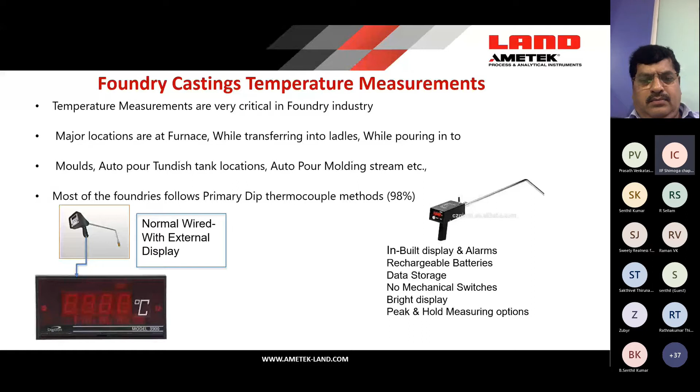Our solutions are, traditionally talking, these are all the locations where the current thermocouple method, either wired, or now with digitalization, you have Bluetooth or Wi-Fi enabled temperature measurements with display. So you can use thermocouples, and of course you need consumables, which means ceramic to platinum type, different types of thermocouple tips available. We estimate more than 95 to 98% of foundries have traditionally been using this thermocouple method.

These are the kind of examples we can show, but you may already have a much better idea of the traditional way of measuring temperature. This is what has traditionally been used in foundries for temperature measurement.

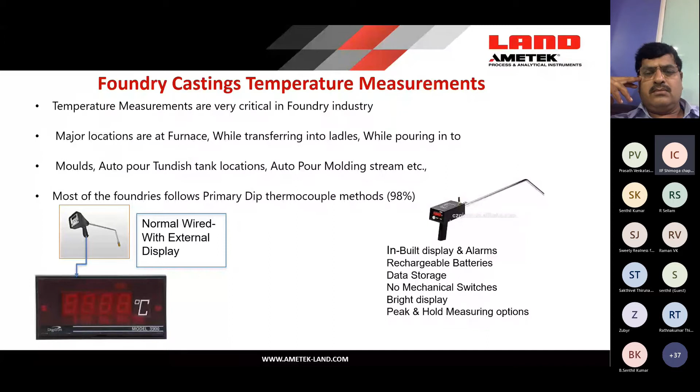So when you talk about this primary method, we all agree that currently the thermocouple stands as the primary method. But talking about the primary method, there are also a lot of challenges with the process. It is not only about the consumable, but I have personally visited more than 300 to 400 foundries in my last 10 years, and worked with foundries.

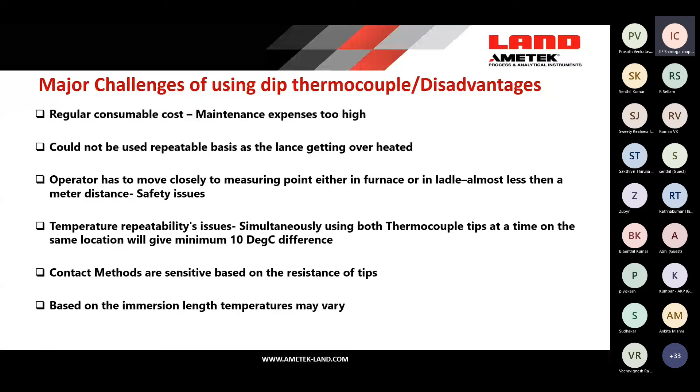While discussing with them, the main challenge in terms of feedback from customers is basically the regular consumables, which come at a considerable cost. So the maintenance is a little high, with recurring maintenance costs.

Any thermocouple or tip consumable could not be used on a repeated basis because of its nature, and you have a resistance challenge because it is a thermocouple technique, basically two dissimilar metals, and when you contact them, the resistance changes and the temperature measurement changes.

This is a kind of scientific way of analyzing. This is what it's been shown. Even when we try to demonstrate, when we measure two calibrated thermocouples at the same point, the difference between those two is really high.

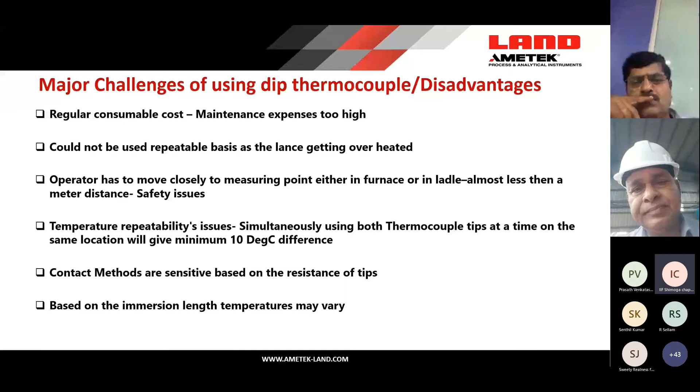So this is sometimes not even acceptable to the foundries. So it is one of the points where we really wanted to propose our solution. It's a kind of challenge.

And then safety. So we are now moving from manual method to automation method. When you talk about automation, Industry 4.0, now even digitalization techniques, and we are talking now Industry 5.0. So safety is, of course, a major concern for any foundryman and any foundries. So when you do these safety operations, there are costings involved.

As I mentioned, repeatability issues when you compare two thermocouples, we are talking 10 degrees, but even from my experience, I have seen even a 30-degree difference between two calibrated thermocouples at a time, because of the penetration or maybe slag conditions, etc. So that is really going to be a big challenge.

Also, it's very sensitive, as I mentioned. So immersion, people to people, the immersion length can vary, and that can also cause some temperature measurement challenges.

So this is where AMETEK Land developed dedicated solutions, which has been present in the market for more than 15 years. When I joined AMETEK Land business in India as a service and technical support manager, this is what first I have seen.

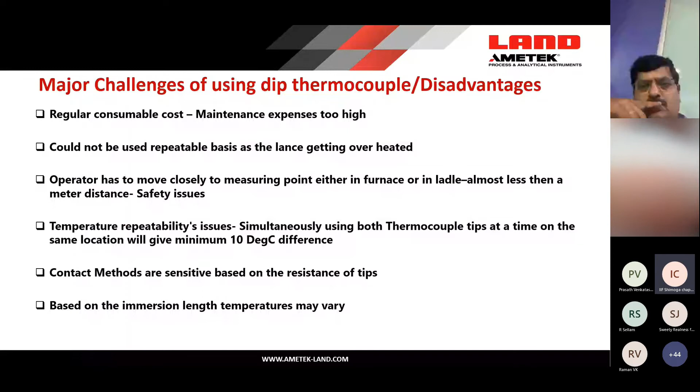I come from the southern part of India, where I did my education in Coimbatore. So I was very curious, and I had some idea about castings. While I was doing my education, I knew the challenges in terms of the process. So when I joined the company, I came to know about these temperature measurements, and I really wanted to position the product where it was existing.

With the dedicated design to support this foundry liquid metal temperature measurement, it is going to be a kind of complement—I could say a direct replacement method for the traditional thermocouple methods being used in the foundries. So this is where AMETEK Land comes in.

It also has various offerings in terms of portable to fixed pyrometers and also various thermal imaging techniques. So we position three major products for foundry customers.

One is Cyclops, a portable thermometer made with a dedicated wavelength where it is able to see through challenges in terms of smoke or fumes, or gases, or visible challenges, so that you can get 100% energy from the surface and it can give you the right temperature.

Of course, these pyrometers need to be calibrated, or I can say compensated, in terms of emissivity and radiance with respect to the calibrated thermocouple. That will be done only once in a lifetime. So normally you can then use the pyrometer for 10 years.

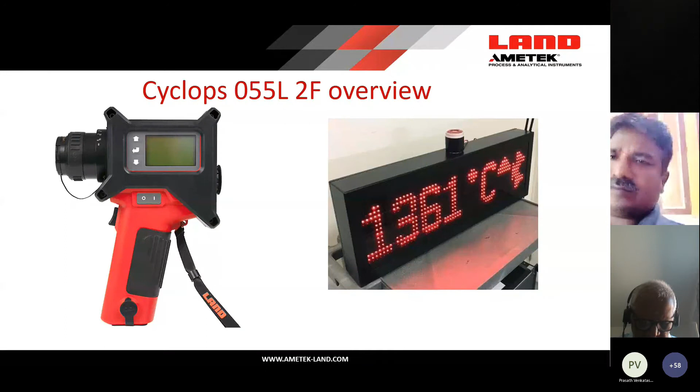Just to give you an overview of the product - when you look at the pyrometer, you can see there is a front lens where you can see the display. You just need to look through the viewfinder and trigger the button, then you can see the temperature.

This is not going to take more than 3 or 4 milliseconds. It's very instantaneous, and you can take multiple measurements, and of course you can compare with the thermocouples.

This is what we normally do during the demonstration. We ask the customer to place calibrated thermocouples, and we measure the temperature and adjust the emissivity constant. Once we set up the emissivity constant, that becomes the constant factor for that particular metal composition, and then you can compare.

Within a day, after a couple of measurements, the operator gains confidence, and we have proven in most cases the temperature accuracy is within 5 degrees - starting from cast iron to gray iron to even SG and various grades, even stainless steel grades. We have done this demonstration and supplied it, and it is working within 5 degrees temperature measurement.

Knowing the foundry application, where it's going to be high temperature and operators always have hand gloves, we designed a dedicated thermal jacket, a protective jacket. This is something we developed for our product to be safer and to last longer in the foundry. We even have a protection mechanism for the lenses.

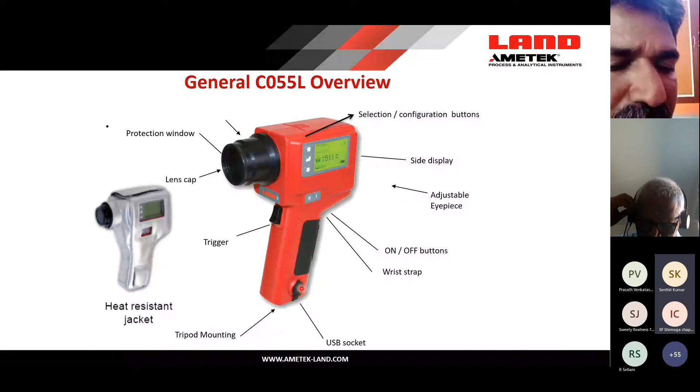And of course, it has a USB - you can directly transfer the data, and optionally we can use big displays. You can transfer the data directly to the display, which can be connected to your computer. So all this one-to-one complete solution we have made.

As I mentioned, a Bluetooth display can be connected - the instrument is connected by Bluetooth. We have LED displays, or segment displays, where we developed 4-digit displays so you can get instant temperature readings within 3 to 5 milliseconds, as soon as you trigger the button.

It's not going to take more than a second to display the temperature, up to 40 meters distance. We have even gone close to 40 to 50 meters in some applications, where the pouring line ends a little further. We can still show the temperature, which is very important for the floor people, particularly the quality person or operation team, when they want to see the exact temperature measured by the operator at the shop floor.

So this was one of the points - you are able to set the alarm limits, so that when the alarm limits are reached, let's say in the furnace, or even during pouring from first mold to last mold, you can set up the temperature minimum limits, and it can give an indication.

Using routers, you can connect Wi-Fi if you have Wi-Fi capabilities. Nowadays we are talking about modernization. A lot of foundries have Wi-Fi capacity, so we can integrate directly to the PC without downloading any wiring system. We can do it via Wi-Fi.

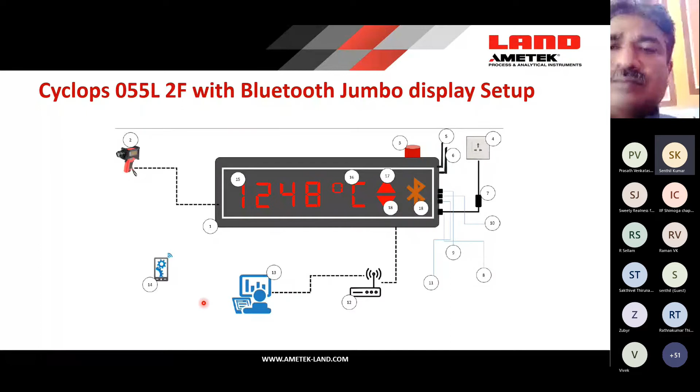So as discussed, the main benefits of our Cyclops pyrometer, talking about it from the foundry's perspective, mainly it is going to produce a major cost saving benefit. The major cost benefit comes because there are no thermocouple tips - this is something we are not just quoting, but based on our last 10, 12 years of experience. We have seen customers, when they started using it, give us feedback.

We have a lot of case studies made across various regions in India. They quoted what the consumables cost was, and after using our device, month 1, month 2, month 3, and now what benefit they are getting. This has been presented by the customers themselves.

So absolutely no consumables, and very fast and accurate temperature measurement, which is very important to control, especially in the furnace. We all know about superheating - I don't need to explain. The challenges of overheating or superheating issues affect the metallurgical composition, which leads to quality control issues and mainly rejections.

It's also going to help directly for the foundrymen. And of course, we have seen indirect benefits, particularly talking about energy saving. When we try to do automatic control of furnace closed loop systems using online or even portable devices at some point, you are able to control the power or energy which is feeding continuously in kilowatt capacities to the furnace. So there is a definite cost saving in terms of electricity, and we can avoid overheating.

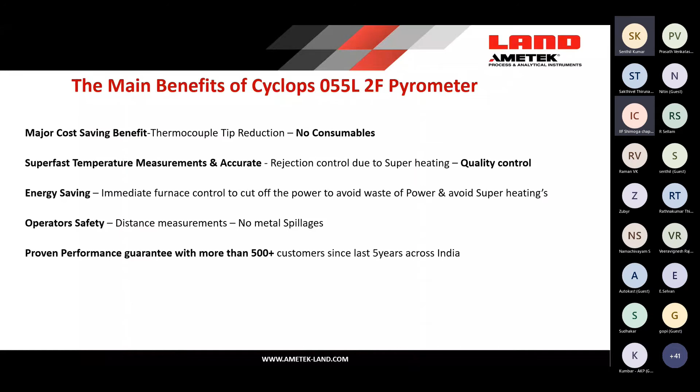This is an example, where you can see the distance at which operators are standing - they don't have to go closer. You are able to measure the temperature at a distance.

And even with this kind of surface, you can be very far and still get accurate temperature, because our device does not have any focusing - it always follows a parallel beam. So the distance does not affect it, whether it's 1 meter, 2 meter, or 3 meter. As long as you can see just 5mm of clear metal space, you can get the temperature measurement.

This is given with a wrist strap, so the instrument doesn't accidentally fall down. We have a big wrist strap over the neck, and also for the hand, and there is a heat protection jacket offered along with the system.

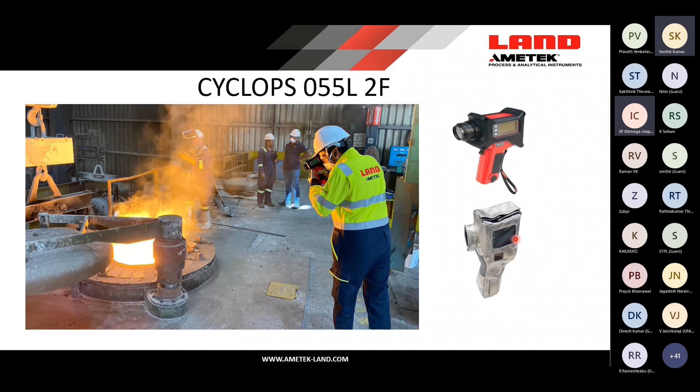So it's a very simple 9 volt Duracell or equivalent 600 milliampere capacity battery. You can use this, and it's very instant.

You can turn it on and off, and there are 4 different temperature measurements possible at a time when you trigger this.

So the major measurements we consider: melt master. There is a special melt master mode which has been designed for this application. Most foundries basically use melt master.

It takes almost 66 readings in a single press within a couple of microseconds. It takes 66 readings and averages them, giving one value, which is based on a kind of bespoke algorithm used in this device to match your thermocouple values - which is very well proven.

And this is where we are committing the temperature difference is not more than 5 degrees, provided there may be regular calibration intervals, yearly ones. So these are all from a maintenance point of view. We have been

told that these instruments are very consistent over many years, and that is the main reason many foundries stop using thermocouples and directly use this instrument, in case you don't want to use any big displays, or even while using the displays, every day you want to take temperature measurements and loggings, basically log history. You can see heat wise, time wise, or location wise temperature data in an Excel sheet. You can log up to 9,999 readings and then it will come on FIFO basis, which can support detailed post analysis of the quality of the castings.

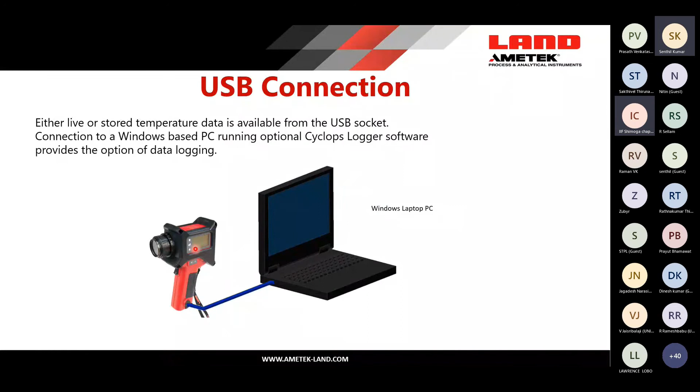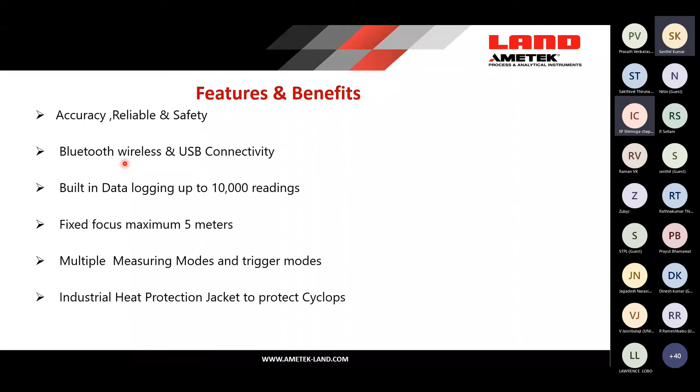Again, as I mentioned, the best accuracy, reliable, and safety. There are options of Bluetooth wireless and USB connectivity, 10,000. The focus can be up to 5 meters, as I explained. There are multiple measuring modes and a lot of value-added protections to safely operate the instrument and keep it running for the long term.

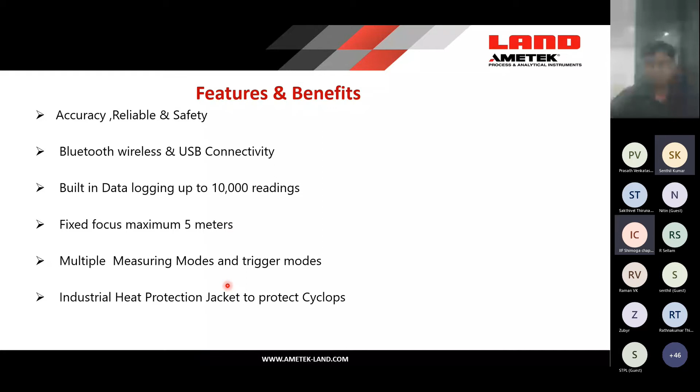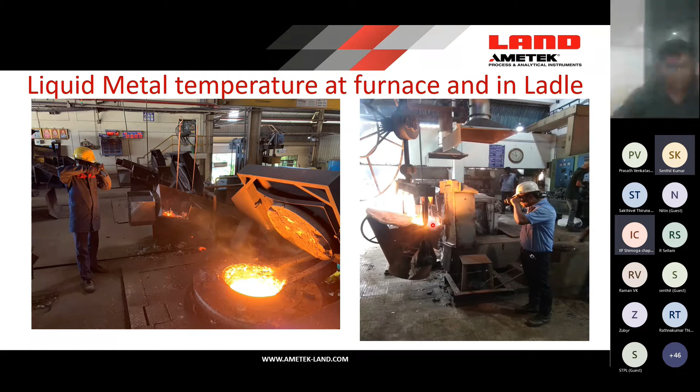While talking about the measurements, yes, we can do this in the furnace, and while transferring from furnace to pouring, even when you transfer the ladle, particularly after the treatment before you pour, you can still take the measurement. These are the locations wherever you can measure with the thermocouple, and even where you cannot measure with the thermocouple, particularly on stream bottom pouring or ladle pouring, you can use this device to get the temperature. As you can see at a distance, at one of the foundries, yes, this is very much possible.

And particularly at the pouring, the main challenge so far has been measuring from first mold to last mold, to see the temperature gradient. Of course, we don't want to pour at a lower temperature, as Mr. Senthil and Mr. Raman particularly mentioned. It's very critical for a finished product. When you pour the temperature, even higher, but with this particular casting, when the pouring time increases, or even the way you are pouring, because of the process, we want to control the last mold temperature within a certain range. So this instrument can help track first mold to last mold temperature, which you cannot do with a thermocouple.

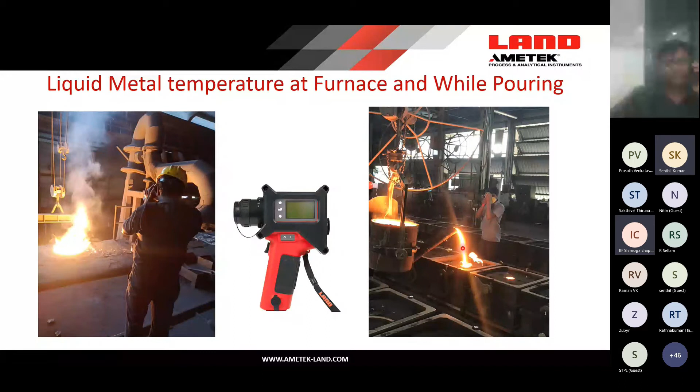And this is the best example, another way where you can see this in investment casting. We have sold 100, 200 instruments for investment casting applications, and it's running well. So this is where you can take the temperature measurements. All we need is just a 5 mm target, and you can measure this temperature.

And again, look at the value proposition we are giving. The instrument will be supplied in a rugged carry case. The operator can keep it very safely once they have measured. It is not for a laboratory setting, it is designed for industrial, harsh atmospheric conditions.

And we provide the thermal jacket, and there is an industrial rubber casing even in case the instrument drops. And there is a cross body sling for the complete body, in case the operator is finding it difficult to use otherwise. You can always use this cross body sling. These are all the kinds of items we supply along with the instrument.

So when you look at this particular Cyclops 055L for Foundries, these are the standard items: the rubber bumper and the thermal heat jacket come by default. And in case you want the protection case, we offer that as optional, and also the cross body sling. Based on the request, we offer these as optional.

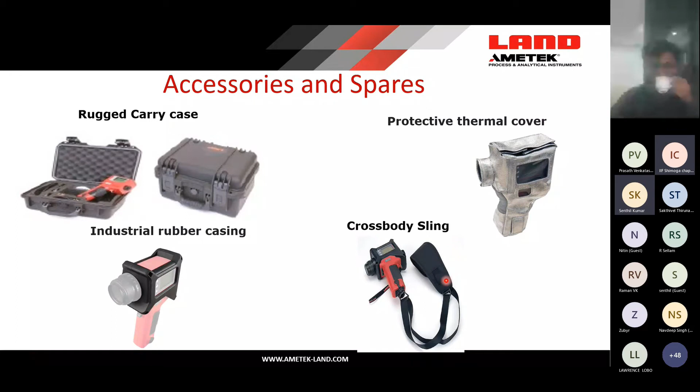So the next topic, as we discuss the second line of items we are offering for foundries, particularly for temperature measurements, is called the auto pour system, basically an auto pour thermometer. Why do we call this auto pour? In most processes with bottom pouring, the stream thickness varies from one size to another, and it is always a challenge to measure with a thermocouple at this location.

So instead, what we do is measure in the tundish, where the temperature is being transferred from furnace to ladle to tundish. We make the top measurement, but we may not have the actual measurement at the time of pouring into the mold. This instrument will help you track the temperature from when the metal is poured into the mold, from first to last.

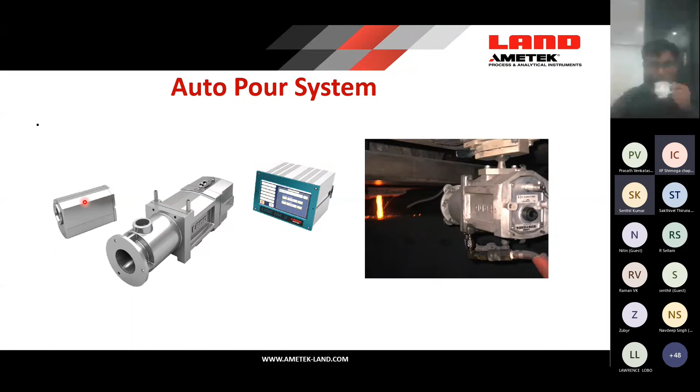So again, same as the portable version, but this one is automatic. We have a complete protective enclosure, water or air cooled. You can use vortex nitrogen purging, and the device sensor is inside. We can connect this to a display that has a small computer which does all the processing, with a specially designed liquid melt master algorithm, so it can give you the timing for any castings, like bottom pouring castings.

When you define the timing, we can take continuous readings over a timing window of 5 to 10 seconds, or even minutes. So based on the casting type, we can track the entire temperature data and compile it. This has also been demonstrated and installed in India.

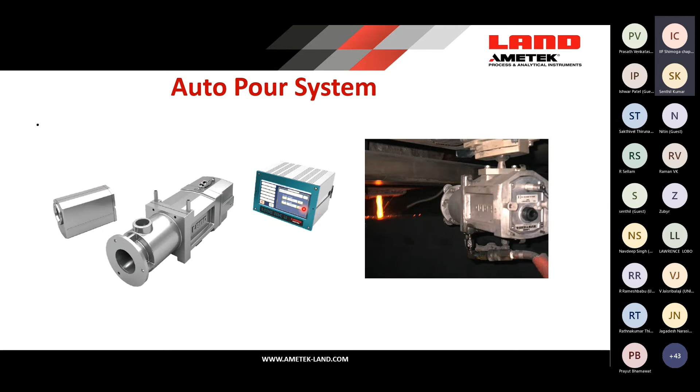We have a device that covers 600 to 1600 degrees, and another model covering 1000 to 2600 degrees. So there are two models, and we can offer whichever the customer is requesting, because what's shown here is general, but we can also offer a higher temperature range.

There is a processor which processes the signal from the sensor and gives you the reading instantaneously. And of course, we can connect this to the jumbo display we've seen, which is basically a 4 to 20 milliampere display, giving accurate temperature measurements.

We have dedicated software where you can see the profile. Over each molding cycle, when you start, the temperature will rise and then drop. So you can see the pattern for each mold, how the temperature consistency has been maintained. We can log the data and provide it.

We have done this in many foundries, and we deployed our product development and engineering team, presented here. We developed and designed this customized software for these applications.

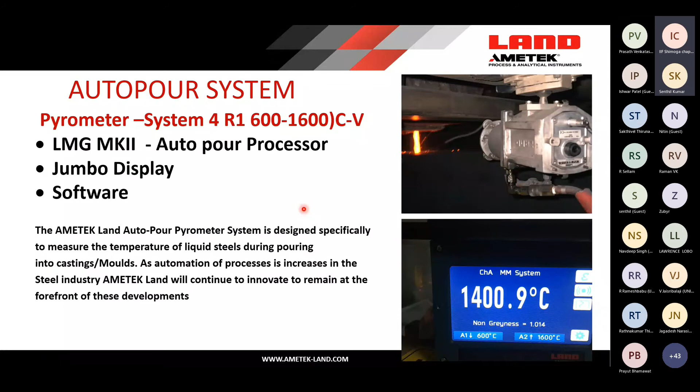Looking at the overview, as I explained, these devices can be connected at 3 to 4 meter distance and focused on the stream. Even when the stream width varies at the beginning and end of pouring, we always track it, as the operator tries to control the tap hole.

Normally the stream width will vary, so we can track this and provide consistent measurement from beginning to end. This can be plotted over temperature, taking mean value, max value, or time-based functions, basically an auto pour function.

It can give you the temperature on the display, and you can generate an alarm using a relay, and even connect it to the customer's PLC for data logging. Apart from that, you can also do data logging on a computer, which is basically an optional item.

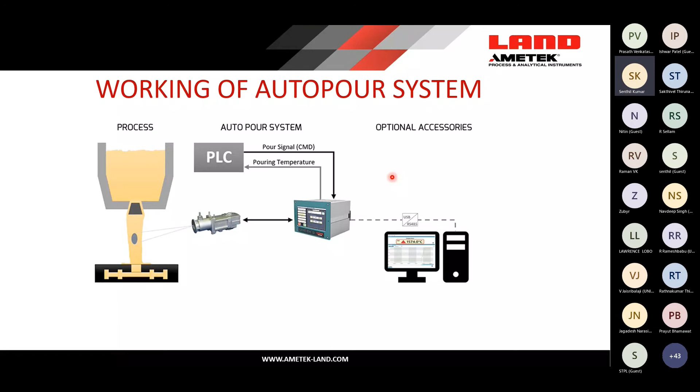So here are examples of how we have installed this. This kind of setup with semi-automatic ladle pouring mechanisms focuses on the stream at the spout, where we can take each mold's temperature. And of course, traditionally, you can see the DISAMATIC line bottom pouring, where we can measure the stream temperature accurately.

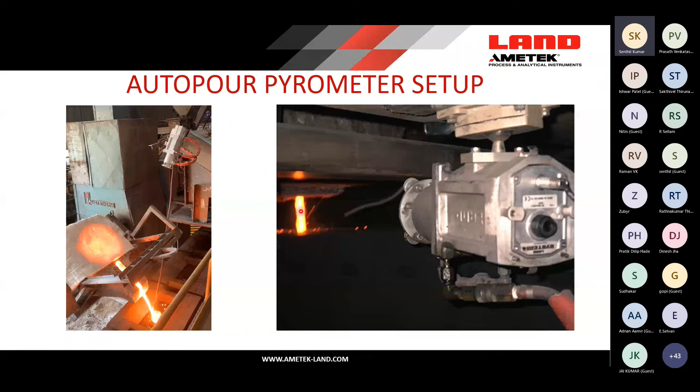When you talk about online measurements, particularly for pouring on the stream liquid metal temperature measurements, it definitely helps with operating cost and improved casting quality. As I mentioned, actual temperature measurement is, in most cases, impossible on the stream, but we are able to do this, and being non-contact, it will not interrupt the process.

It always operates non-contact at a safe distance. We ourselves do the survey, so when a customer calls us for a demo or even post-order processing, we do the survey and fix the location, working with the customer to ensure the instruments are kept in a safer place for long-term running conditions.

All these devices operate at a special wavelength dedicated for metal applications. The metal radiations we chose are with respect to the temperature band, and these are all optimized to minimize errors due to changes in grade or stream width. We have adopted these techniques to address all these conditions.

There is no major installation conditions. Once you choose the location, once you align and focus, it should be for the long term. And of course, periodic maintenance is needed, though we give the purging. So something like every 3 months or 6 months, we normally do this basic maintenance.

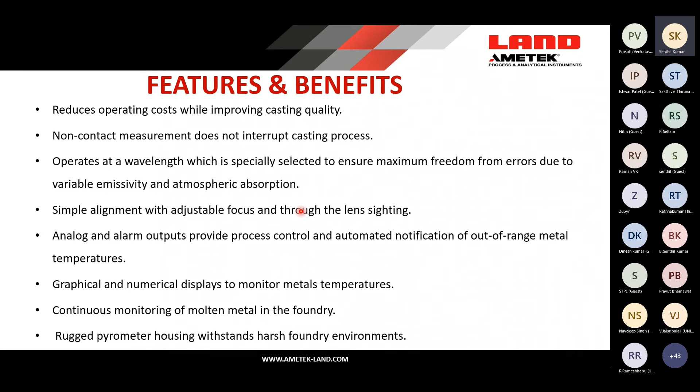And again, it's designed for very robust industrial applications. As you all know, I mentioned during the introduction the three methods and three different types of products. And this is the 5th generation product, so it's completely digital.

We have Power over Ethernet, and this device can be installed online on the furnace and connected directly to the computer. You can have live streaming video where you can monitor the furnace conditions. The operator or the operation team can want to see the quality or operation from a distance.

Even you can take the networking Ethernet connections to the computer and network, and you can see remotely with the monitor, large monitors. You can see the live video from the camera.

You don't need to go for alignment. You don't need to go for the location. You can see it from remote. This is the kind of 5th generation Pyrometer, and you can do Modbus TCP/IP communication for data transfer.

If you want to take a particular mold temperature, you can call for it. We have Modbus programming. You can able to take the temperatures.

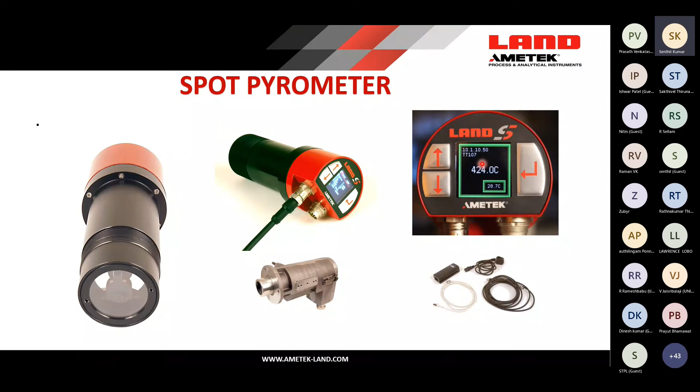As I mentioned, you can see where this particular device was mounted at a 10-meter distance on the shop floor. So it is focused on the metal surface where you can see the temperature on the screen.

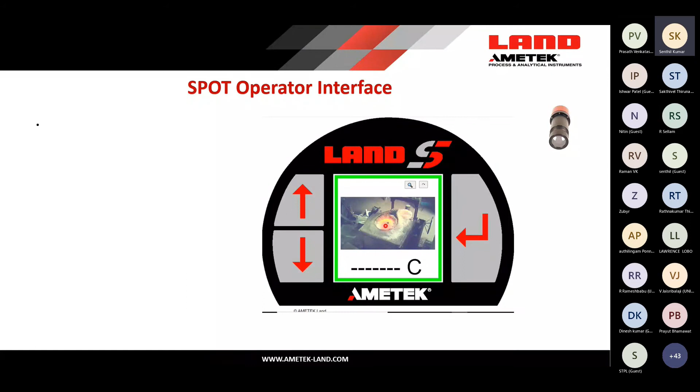This is a web interface on the computer where you can see periodically, or we can make it live, so continuous monitoring can be done remotely. This is the best advantage when you have an integrated, inbuilt video camera webcam in the device.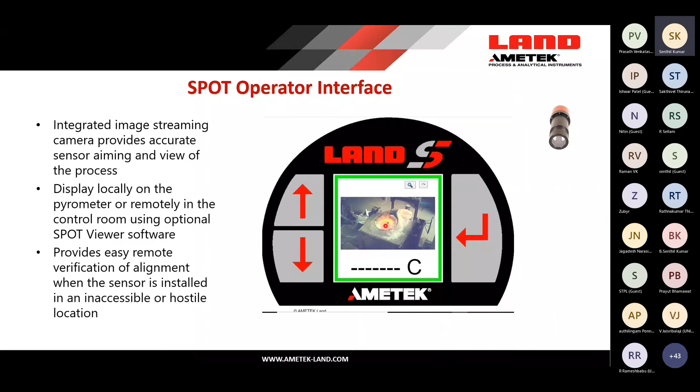So again, both options, local as well as remote display, are available for easy verification and alignment purposes in case of any changes.

Yeah, so as you can see here, very conventional, and we have a sapphire window. Sapphire is a kind of the hardest material, equivalent to diamond. It can only be damaged by diamond.

Even we could see this device, there is sputtering, but still this sapphire window can't break. So it is robust, very reliable, and it will not be affected by any dust or fume. So it will be a real protective optic for these kinds of sophisticated instruments.

So as I mentioned, yes, this technology has been developed over many years of experience from Land, and this is a kind of remarkable product. We have supplied many instruments for various applications, including this kind of online temperature measurement.

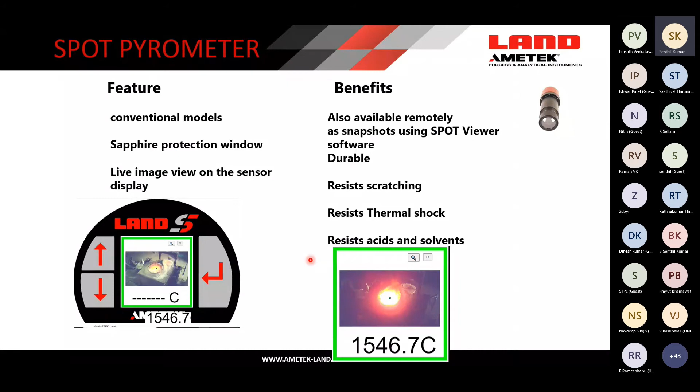So again, yes, we make structures based on the application. This instrument is installed to take live temperature measurements. These are a couple of examples we want to quote.

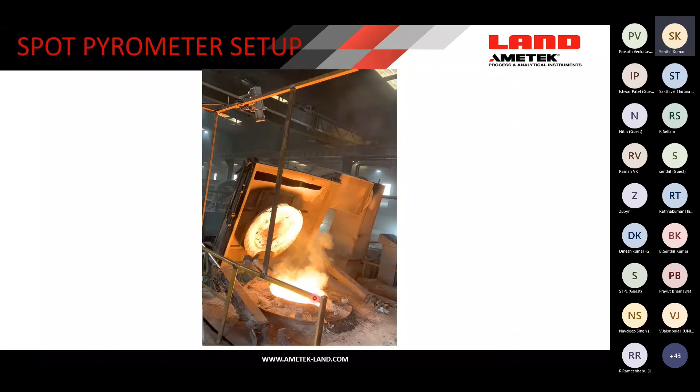Yes, so in a similar way, the online auto pour pyrometer for the 5th generation, the spot which we are doing, similarly, which can be complemented. The auto pour pyrometer is mainly developed for bottom pouring, where you can have automatic pouring mechanisms and the stream.

And this pyrometer can be used online to complement our cyclops, where you can always install this online thermometer for live temperature measurements. So complete processing will be done inside the pyrometer. You don't need to have a separate processor where you can see a sensor and processor.

So this is the 5th generation. You have an inbuilt processor inside the pyrometer, and you simply need to connect it to the power, and you can take 4 to 20 milliampere.

So it's online, closed loop we can make. And again, same benefits we talked about: thermocouple consumables, operator safety, and very simple to install as it has an integrated web camera. You can easily see this from remote while doing alignment, etc. It will be very easy, and wide temperature range.

And we just launched some higher temperature measurements, which can go up to 3000 degrees for special alloys, for titanium, or even some special alloy applications, vacuum chambers, particularly for very high strength steel applications. There are some requirements coming from customers for higher temperature range, so we extended the current models up to 3300 degrees. We launched this recently, so there are various models and various temperature ranges available.

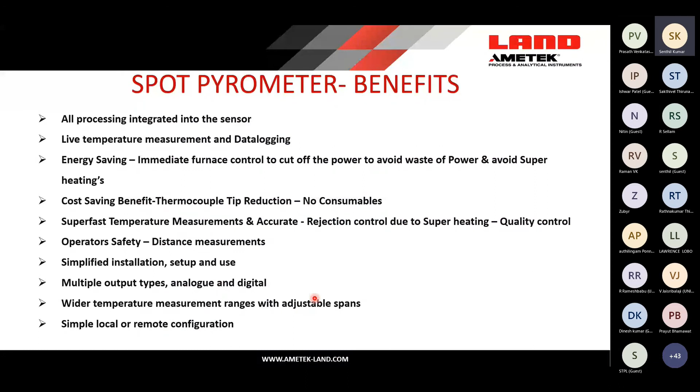When we talk about this product capability, having 75 years of experience and expertise, we don't just sell the product—we really care about the products which have been installed or supplied over the last 30 years. So when I joined, this was the main requirement from customers in India particularly. So we developed our state-of-art one-roof repair and calibration facility in Bangalore, which has been accredited to NABL, ISO certified, where we can do 100% repair capability in India itself.

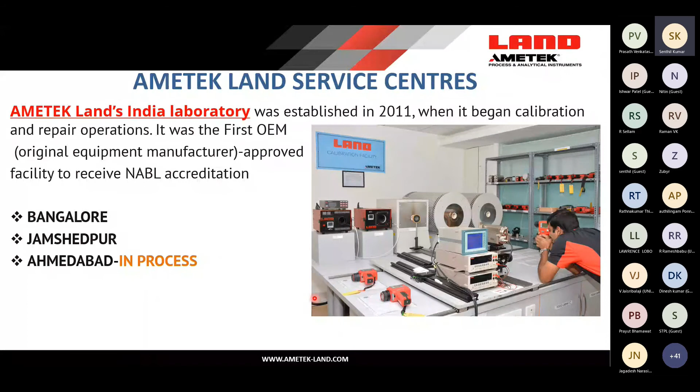So then we extended the calibration facility to Jamshedpur to support the Eastern Belt, to handle major key account customers like Tata, Jindal, and all the customers, and a lot of foundry members. And in Bangalore we have this facility—it was originally designed to support our local customers. And in Ahmedabad, where we have more than 250 instruments, we are about to launch the service center. It is under process. The main requirement is really to support our instrument base, wherever it is installed in India and working since many years. So we not only supply the product and demonstrate it, but also provide necessary support to maintain the instrument for a long time.

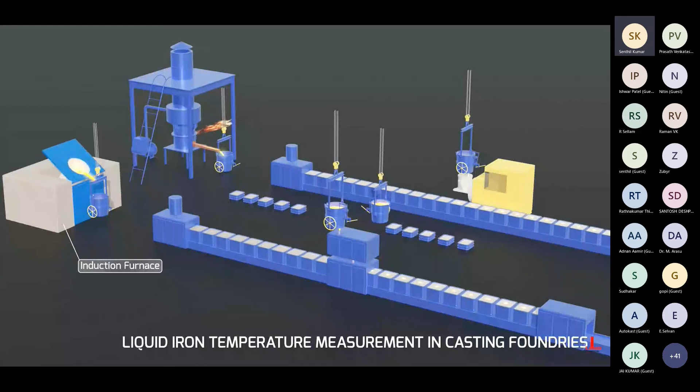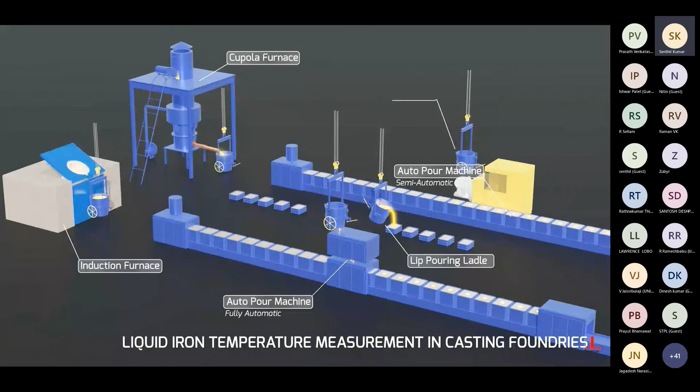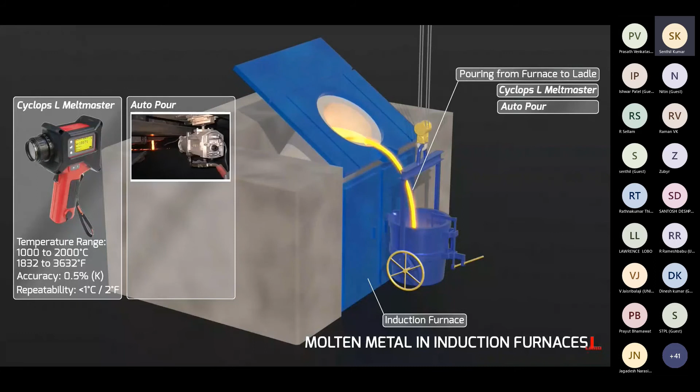As I mentioned, these are the different types of applications where temperature measurement points are critical, and we can always use this. For example, the portable pyrometer at the furnace, meant for 1000 to 2000 degrees. And while metal is being poured, we can measure the stream, and we can even do auto-pour at fixed locations, or spot measurements.

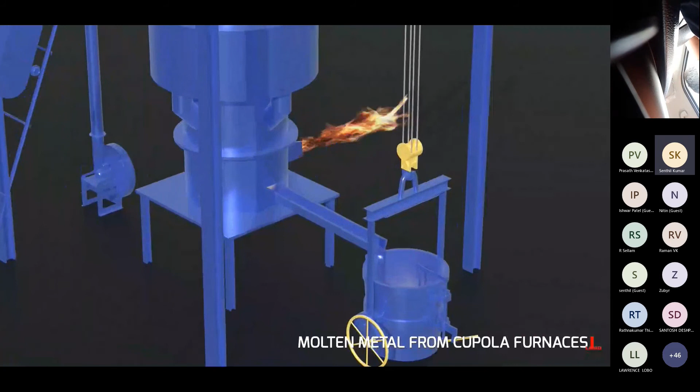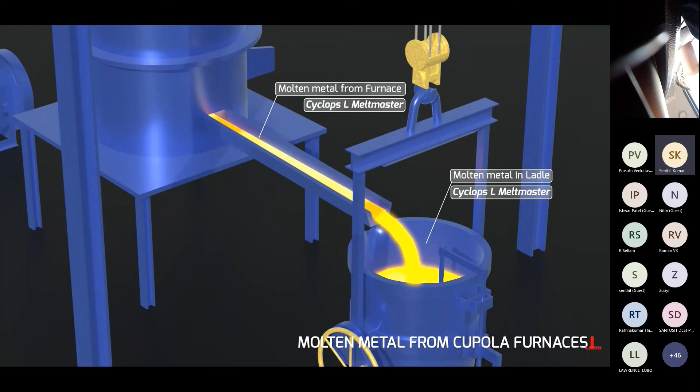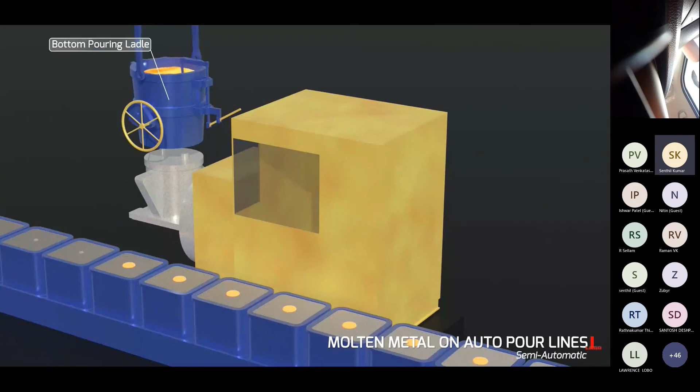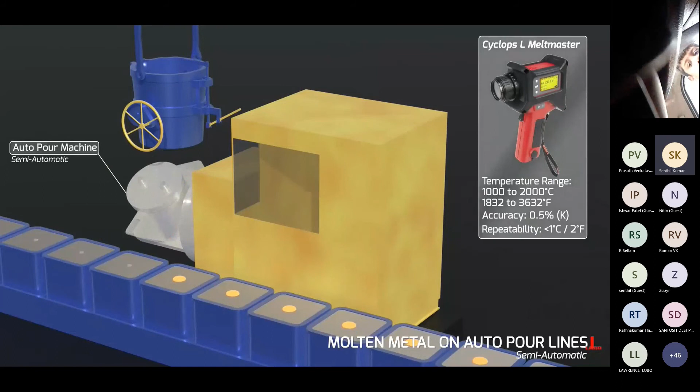We made a kind of animated video, typically showing some furnaces where you have liquid steel, direct liquid steel. You can of course use the thermocouple, but when you use the thermocouple we know the challenges in terms of penetration. This pyrometer can read instantly within 3 to a couple of microseconds. And there are applications we have developed for ladle to semi-automatic lines, and you can always use the Cyclops to verify first mold to last mold temperatures.

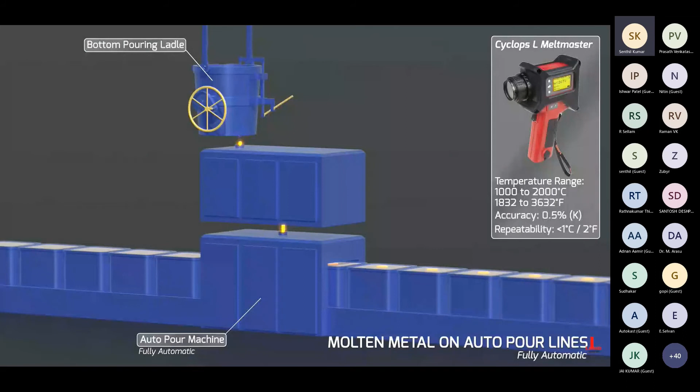This is a fully developed, designed product for this kind of application. And of course, we have a huge reference list and case studies, so we are always happy to share those in case of any requirement for reference. With that, once again, I would like to thank all the valued members for giving this opportunity. In case of any questions, we are now open for questions, so we can discuss them now.